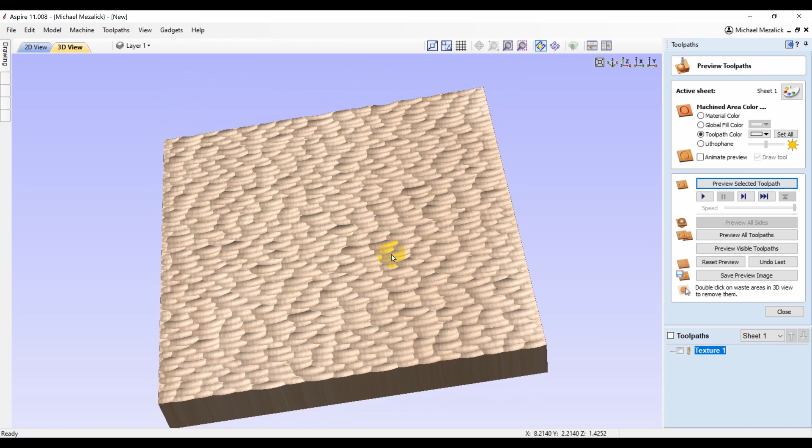So let's see if we can apply this texture to an existing model, giving a little roughness to it, a little hand-carved quality.

I go to our Clip Art tab and randomly select one of the existing models within the software. Let's say the horse. Simply double-clicking on it brings it into our session of Aspire, and I'm going to enlarge it so we can use this texture to see if it's going to work.

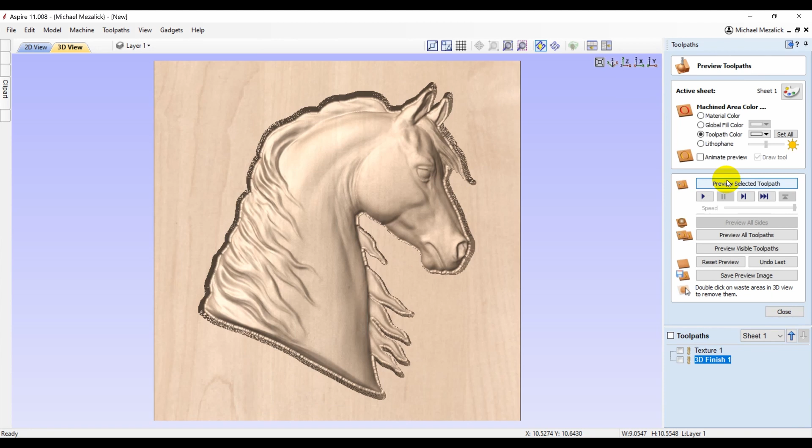I'm also going to create a finish toolpath. This is just for an example - I would maybe use a roughing toolpath in real life, but this is just for the software example. So there's the finished toolpath of our horse, and here's the textured toolpath that I've created.

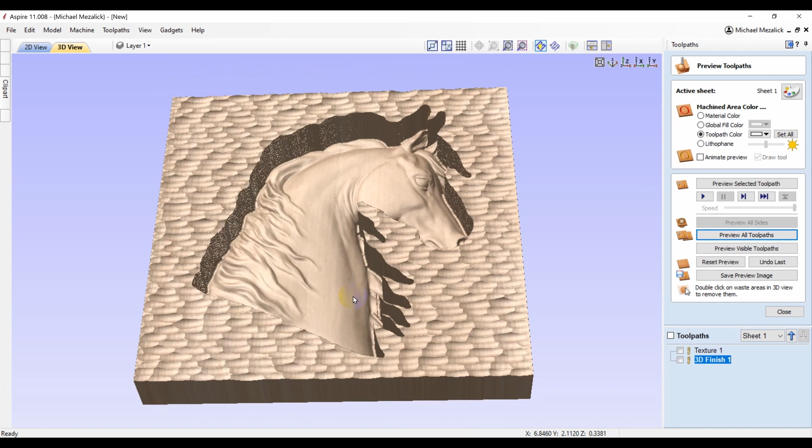Interestingly, the textured toolpath was not applied to the horse itself. The logic is that the texture toolpath will only cut on the surface of the material, unless we go back into the texture toolpath and click on the checkbox that says to project the toolpath onto the 3D model.

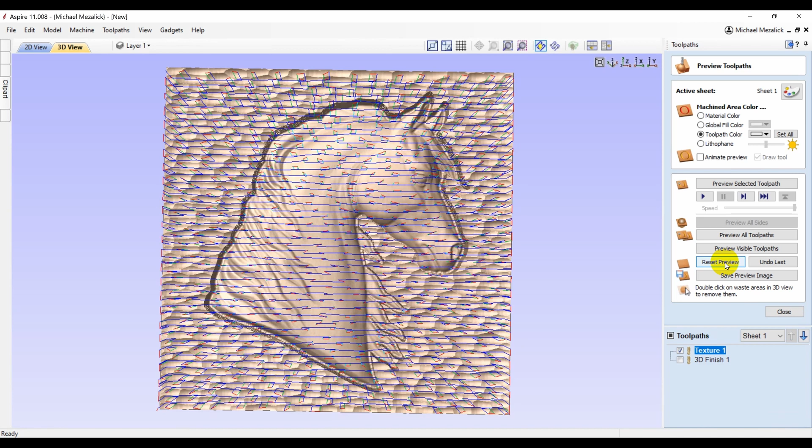Now, if we rerun the preview of our textures, you'll see that the texture has been applied to the horse head, but it also has taken all of the material away.

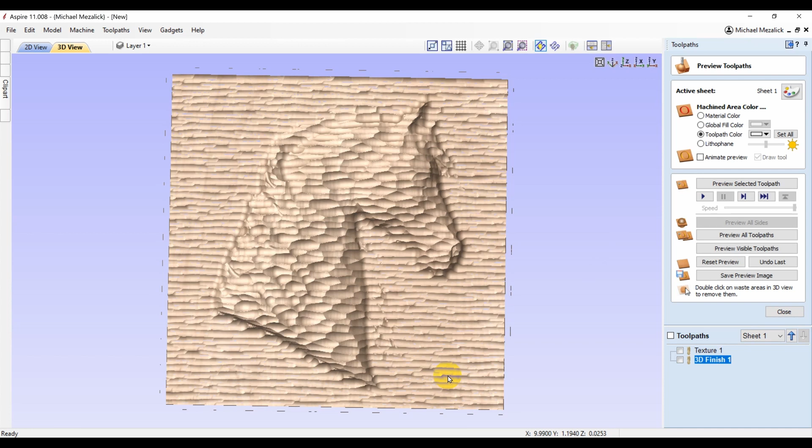So let's run the finish toolpath to see if that helps. It certainly doesn't look like a good finished horse head. Not really what I expected.

Let's try this another way. We take our horse head and create the bounding vector around just that model. I select that vector and create a texture toolpath using the selected vector and the 3D model.

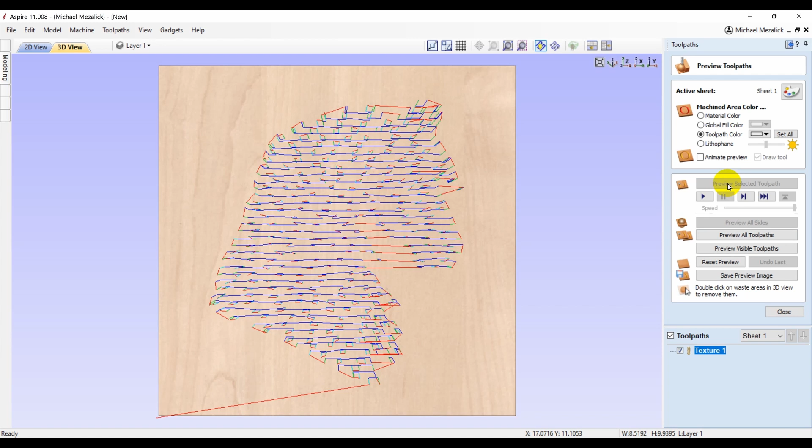And now we have another example of that texture, but it certainly doesn't have the detail of the horse head.

So I go back and create a finish toolpath, once again, of just the horse head to see if this can help at all.

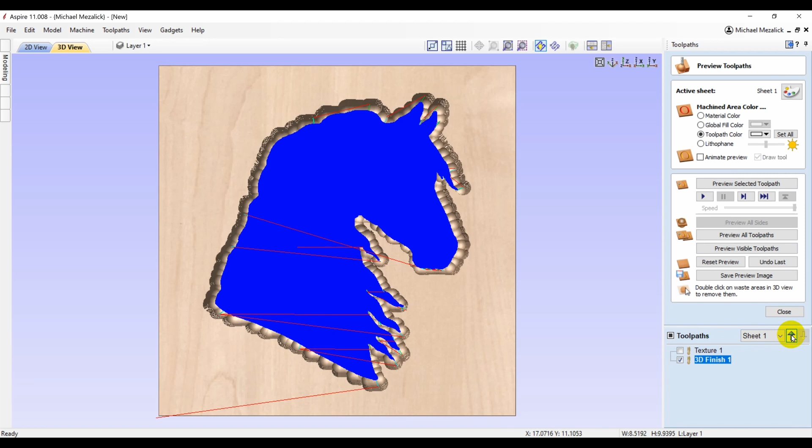Preview all toolpaths after resetting the preview. And still, it's a rather disappointing look. There's our horse head and our texture toolpath - not what I would consider acceptable.

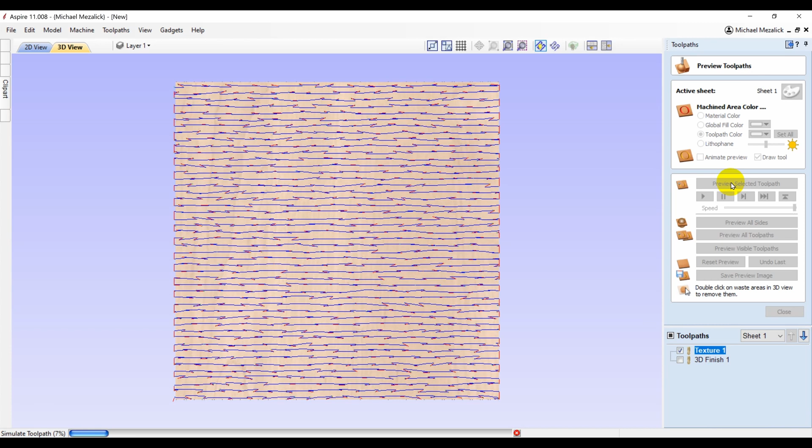Maybe there's another way this could be done. I'm going to create my texture toolpath, not projected onto a 3D model, just so it's a flat texture, in a sense. If you've watched my other videos, you know I'm very fond of using what I call a skin.

So I'm going to create a component from this preview and apply it to our horse head.

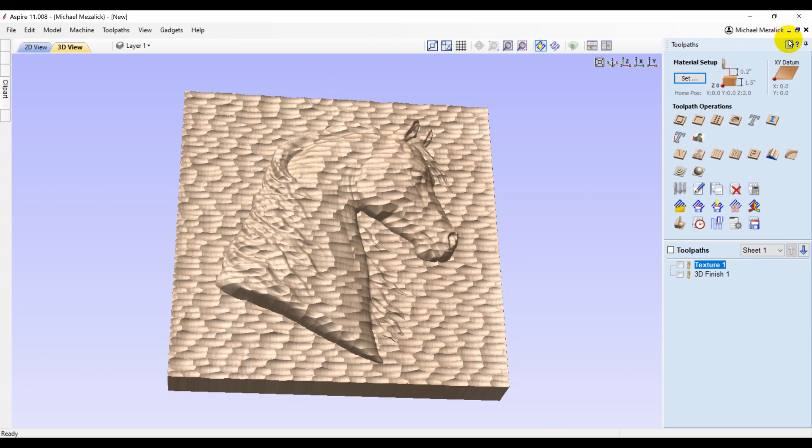You can see in the component tree I have the horsehead clip art, as well as now this texture. Both are set to add, so the texture has been added to the horsehead.

We'll choose that bounding vector of the horsehead and eliminate the outside texture, just so the texture sits on the horsehead.

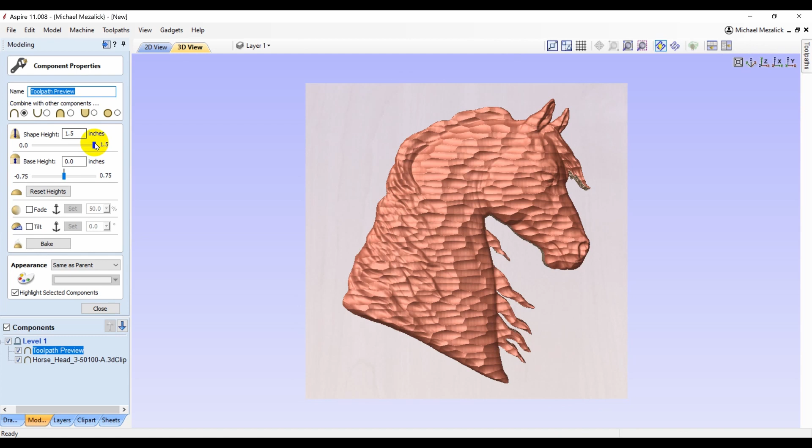Since it is a component by itself, I can adjust its base height and its shape height. This gives me a little bit more freedom to slightly change the end result.

Looks a lot better than the previous attempts, but it's still not what I was looking for. The reason being is, if I was to carve this out, the stroke of my knife would not always be in a horizontal position, or vertical, or whatever angle I chose for the software.

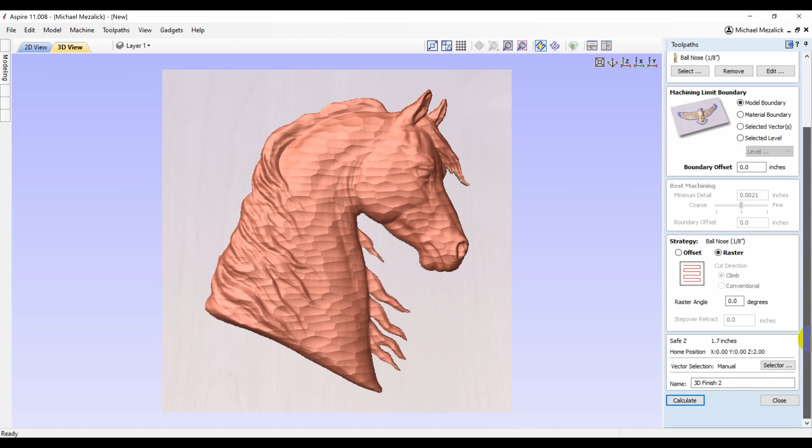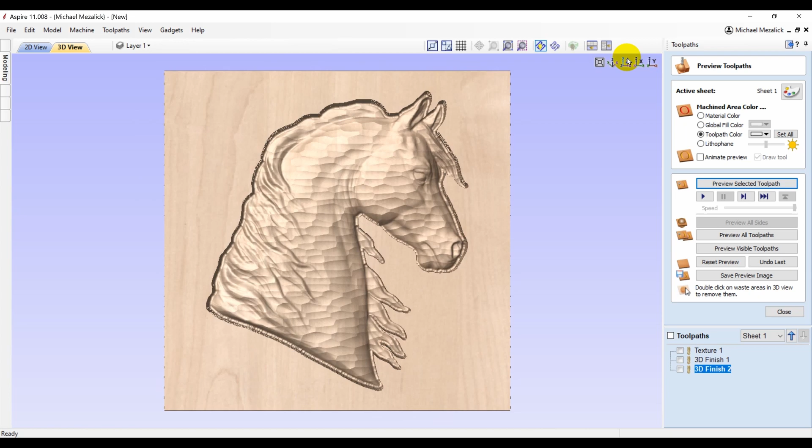I think the strokes of my knife would follow the shape of the head. So, can this be done within the software? Let me show you what I came up with.

So let's start over. I have a session of Aspire open, and I'm going to create an oval. And from that oval, I'm going to create a component shape, a dish shape.

There's no set size on what this shape should look like, or even what the property should be of the profile, whether it's a dish or a pyramid or a flat. I just chose a dish shape because I envision this to be more of that gouged look that I'm trying to recreate.

I right-click on that, and I'm going to save it as a brush, a sculpting brush. I delete my vector, I don't need that anymore, and I uncheck the brush because I really don't need to see it. For this example, here's the new thing in version 11.

We can go into the sculpting tool, and we can choose to use a sculpting brush as our tool. Now this is only available on the deposit and remove options. You cannot use the sculpting brush on the smooth or smudge.

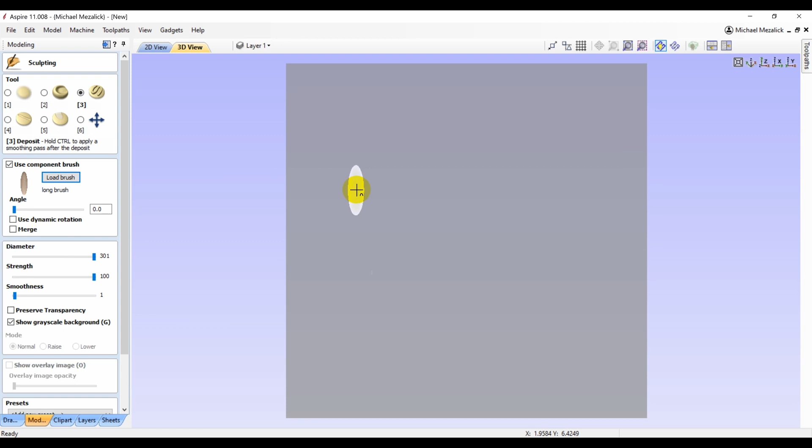It creates a new component. I can take that and hold my left mouse key down and drag it across, or I can keep clicking. But with the property set as default, you could see it's an odd end result.

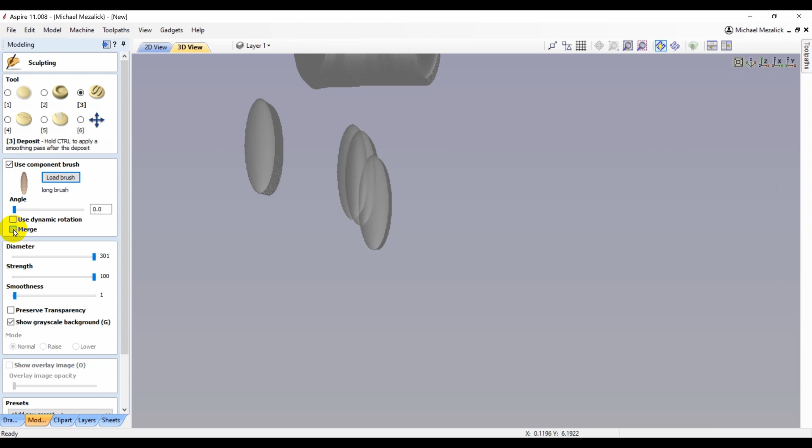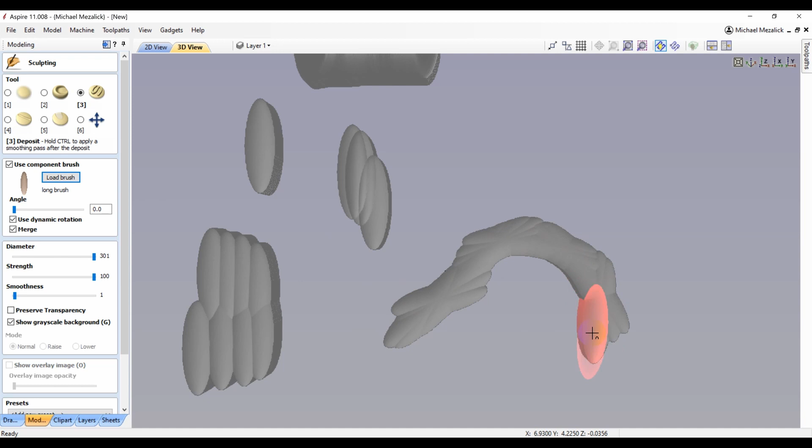Let's choose the merge these components together. And it's starting to look like that hand-carved texture that I'm looking for. There's also the option of the dynamic rotation. With the sculpting brush, you can also rotate it to position it as need be.

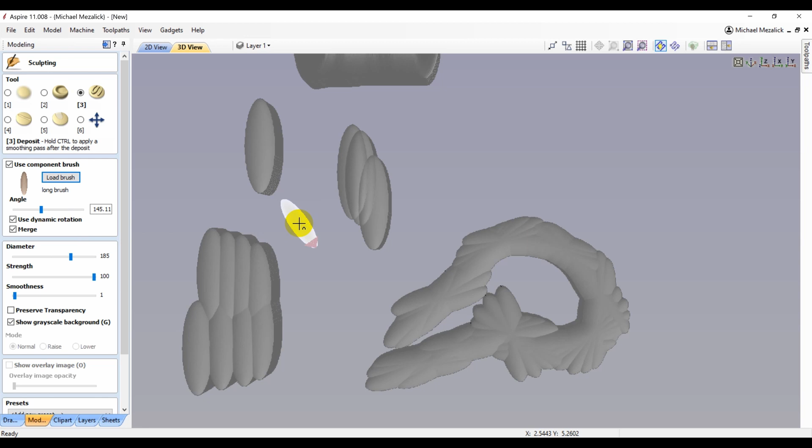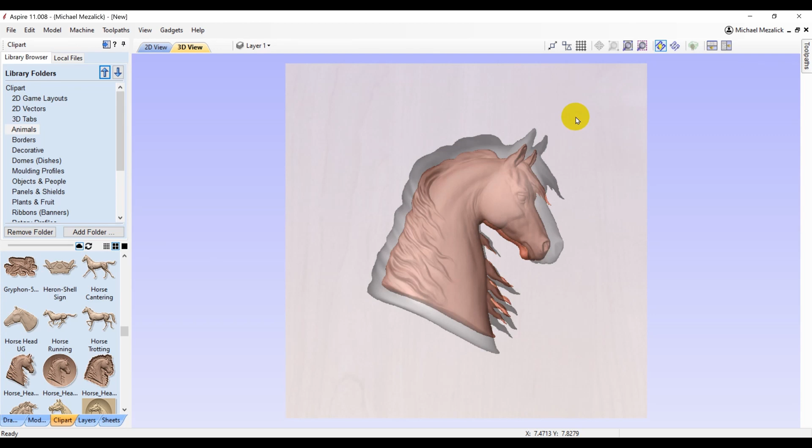So I wonder, is this possible to use to create a texture for my horse head? Let's try. I bring in a new horse head, increase its size so it fills more of our workspace. Go back into our sculpting tool. The horse head is not selected because I'm going to be creating a new component of that sculpting brush.

Choose the brush. Set it to merge. You can see the grayscale can be visible or not if you'd like. Change the diameter to full size. And I can start to apply that texture to where the horse head is.

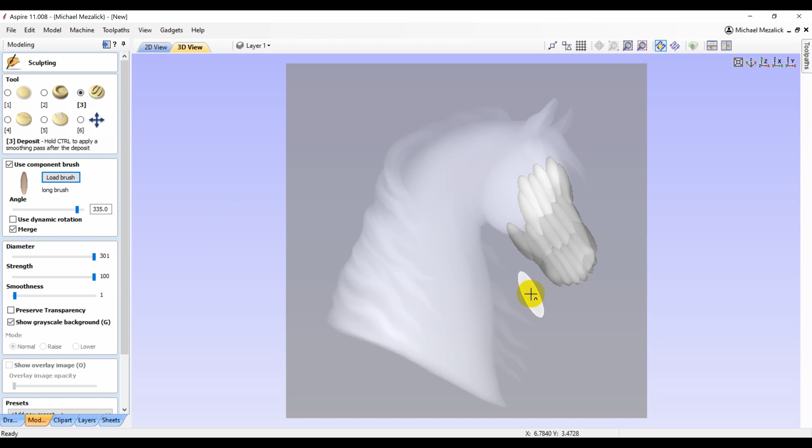And I'm going to rotate now this brush, this sculpting pattern, to sort of follow the undulations or shape of the horse head. I try to envision how I would carve this out if I was actually making it. It does take a little bit of time to think through this. At what angle would you be carving this out with a knife? And what size would you be using?

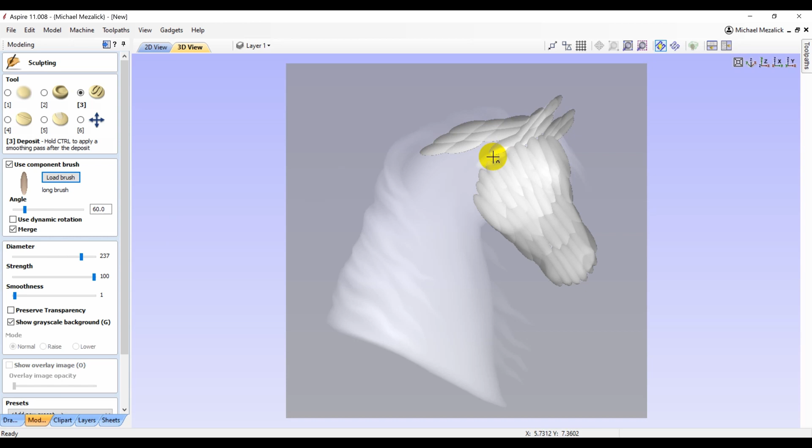I can change the diameter or the size of the component that I'm using for the ears, if need be. I rotate the brush so it follows the curve of the neck of the horse, giving it a more realistic hand-carved look.

The previous texture that we tried from the texture toolpath only goes in one direction. This new approach gives you the option to create a similar look, but using different directions.

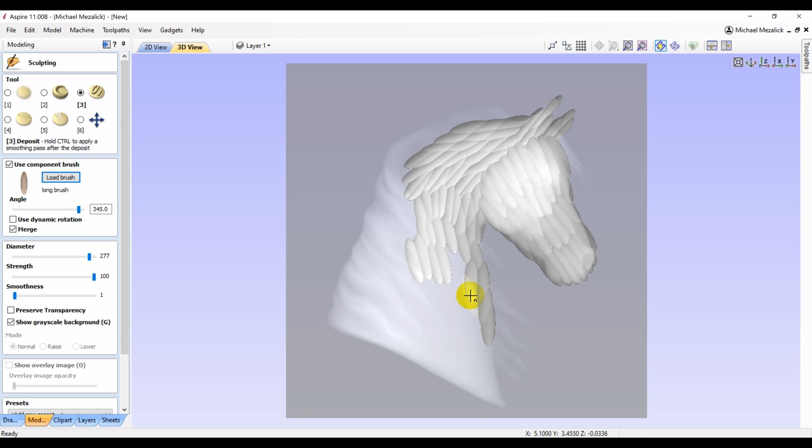I choose not to carve the mane of the horse, simply because I think it'll add a little bit more interest. If I go beyond the horse head, I can always delete that with a bounding vector. When I'm done, I keep it and hit OK. And that's what the texture could look like.

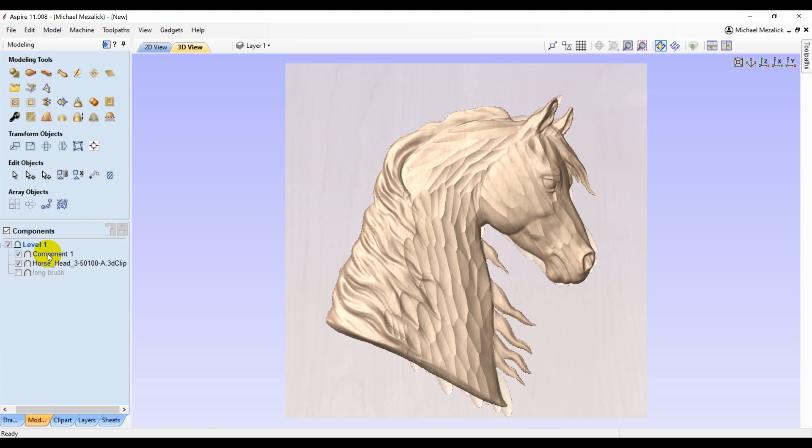Because it is a component by itself, I have the opportunity to adjust the shape height or the base height to make it a little bit more subtle or more pronounced if need be.

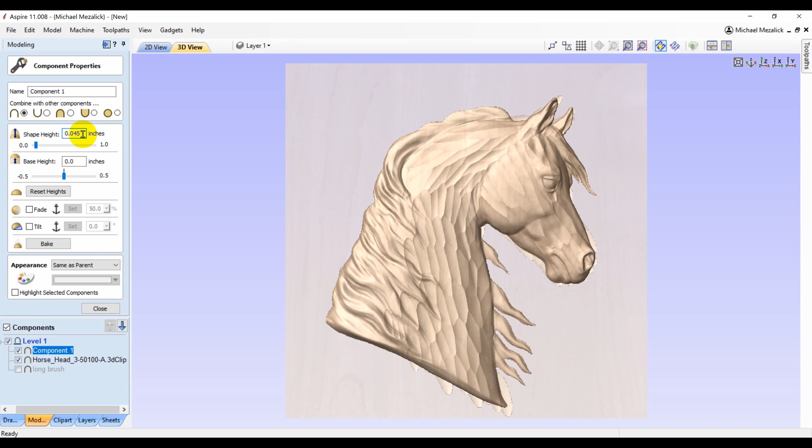So this is just one example of how you can use this new option within version 11, the sculpting brush, to be able to create interesting patterns.

I click on that bounding vector I've created, choose my textured option, and delete everything outside, or keep everything within that closed vector. Again, it's just one more option on how you can change things. The before and the after.

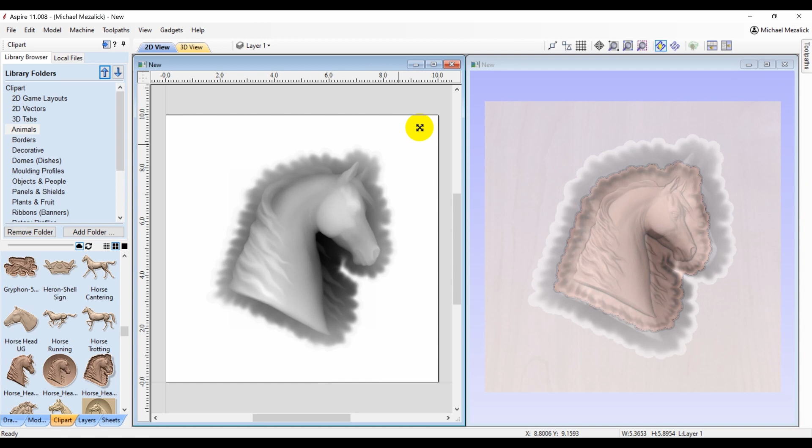Let's take another look at an option that you can use with this sculpting tool brush. Within our clip art library, we have several versions of the models that are included. I'm going to look at that same horse head, except this time it's in this textured or undulating dish shape. I think it's supposed to look as if it was hand carved. I will say I've tried to replicate this many times over the years and was not quite successful. But it does seem to be a popular style for a lot of people.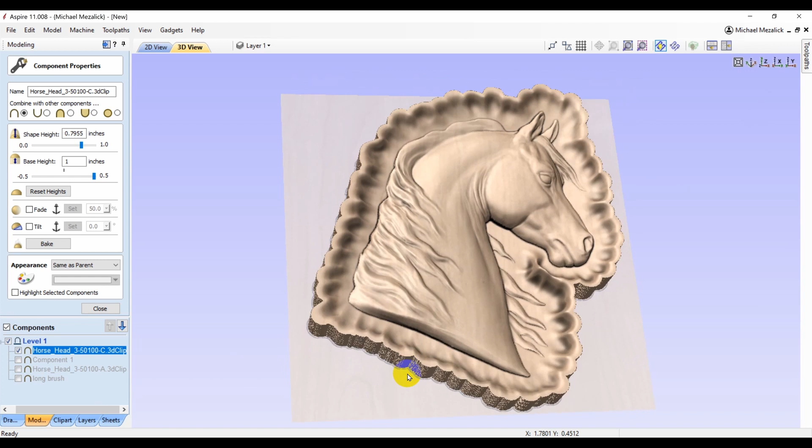Here's an approach that you may want to consider. We have our original horse head. We're going to go, as we did previously, into the sculpting tool. And we're going to select a new brush that I've created.

I adjust the size to full strength, and this is the size of the end result of the brush. I wish it was bigger. I wonder if there would be a way to create a larger brush.

If you're familiar with what I talk about, I always think using very high modeling resolution for your 3D work is appropriate. I also know that this new sculpting brush logic is based upon the number of pixels. The 301 that you see on the slide bar represents that there are 301 pixels being utilized to create that shape.

So, if my very high modeling resolution is only using 301 pixels and creates a rather small component shape, I started to think if I changed my resolution within this model to standard, would my brush then be larger because my pixels are larger?

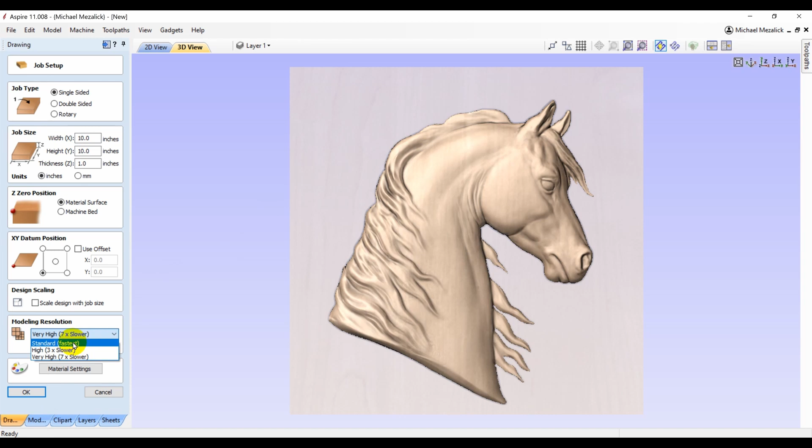Let's take a look. I go into my job setup, change my modeling resolution to standard on the fly. Go back into my modeling tab.

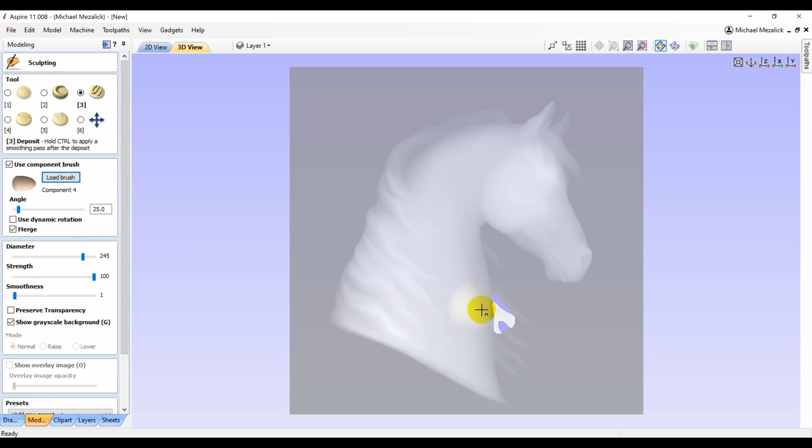You'll see that my brush is much larger. I choose the sculpting brush that I did previously, and now look at the size. The modeling resolution in this case at standard does offer more benefits. It allows you to have the largest brush possible because there are 301 pixels within that shape.

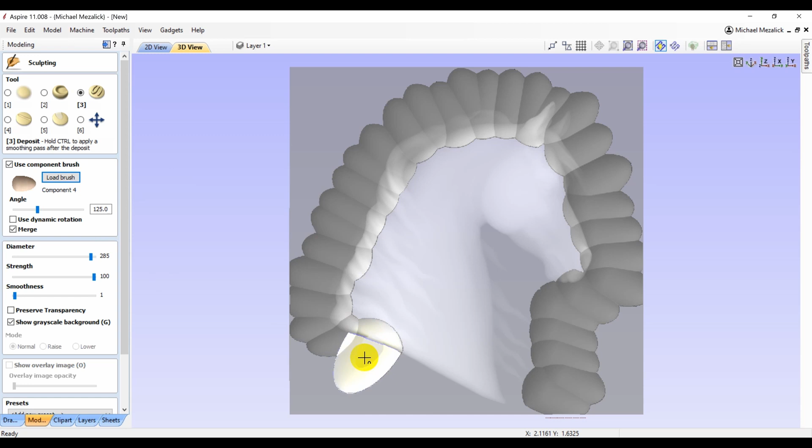I choose a size that's appropriate, and I go around the perimeter of the horse head, creating that hand-carved look. The easy way to rotate it is simply using the wheel on your mouse. You could use the slide bar if you'd like, but the wheel seems to be a lot quicker, and simply click. And there's our component.

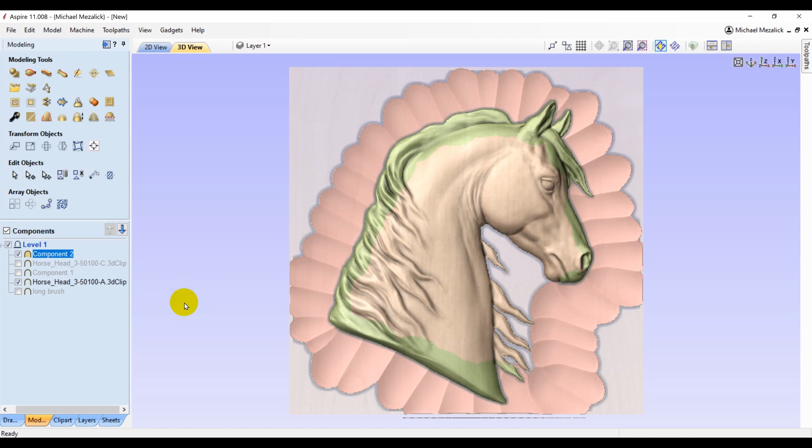Change the property to merge. I'm going to adjust the base height just so that I can see what it looks like more realistically. I also need to adjust the base height of the horse head so it sits above our new textured perimeter.

Add a zero plane, and it's starting to look rather interesting. Something similar to the horse head that comes with the software. That hand-gouged perimeter look.

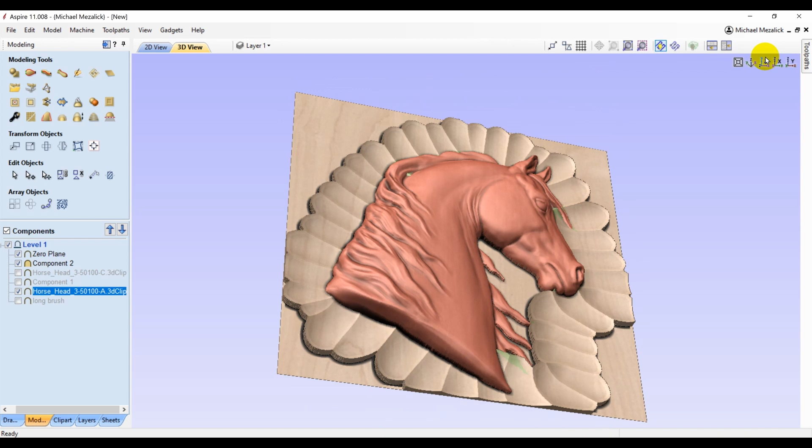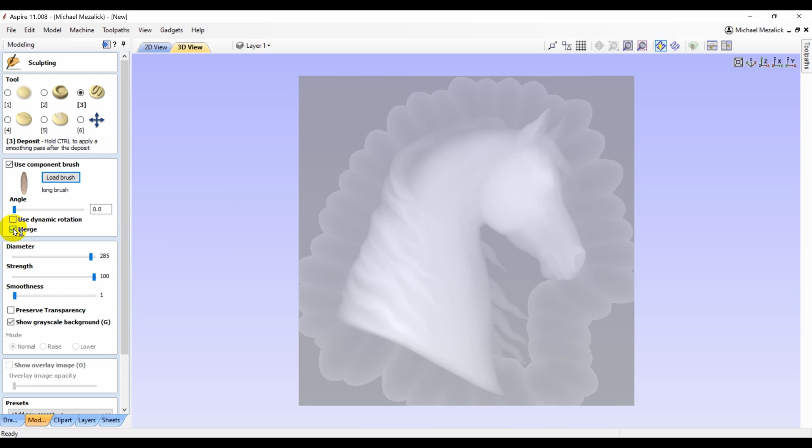I'm going to add a little more texture to the area right underneath the horse head itself, that flat area that I missed. I choose another brush that I created earlier. It's a little longer and a little more narrow to be able to create gouged marks.

You can use any 3D model as a sculpting brush, so you can create your own. Change the base height of this new texture just so it breaks the surface.

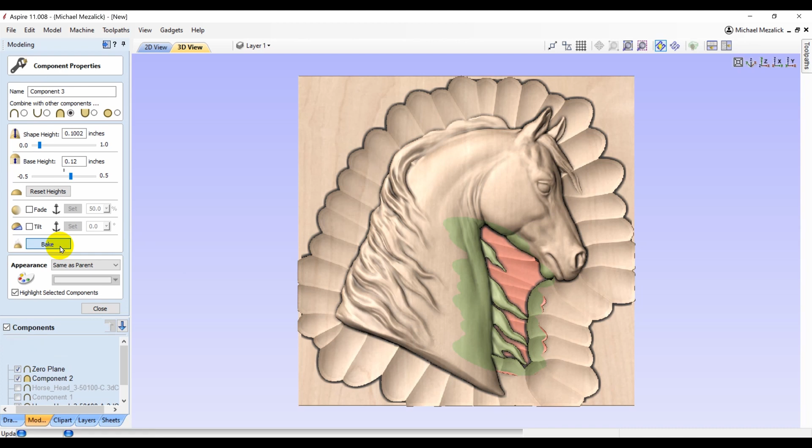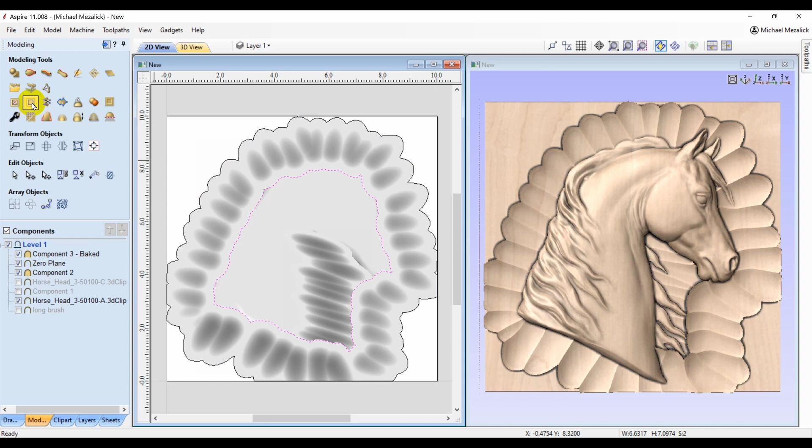Using the technique of drawing a boundary vector around a component and then selecting a vector to delete or keep an existing component becomes useful. And since they are their own components, you can adjust the shape height or the base height as needed.

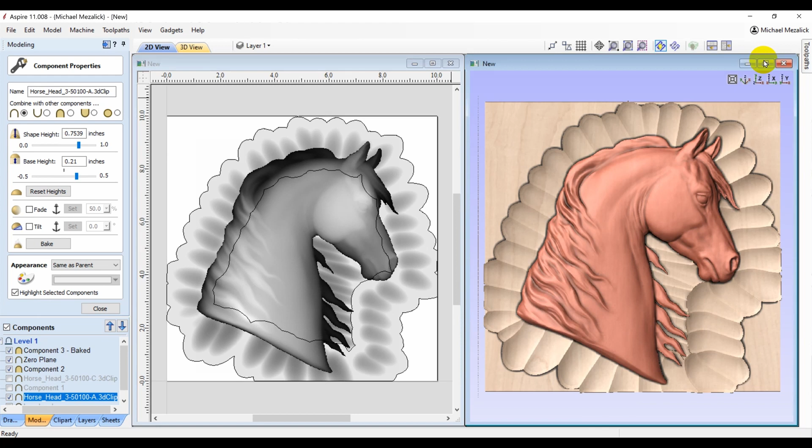So there we have it, a hand-carved look for the background of the horse head.

Let's take this another step further. I'm going to create a new session of Aspire. The normal job setup. The modeling resolution is very high. And I'm going to create some text.

With that text selected, I'm going to create a component. Just a regular flat component with some base height. With that new component visible, I'm going to add a draft to it. This is just to give it a little bit of interest, a little bit of dimension. Looks good so far.

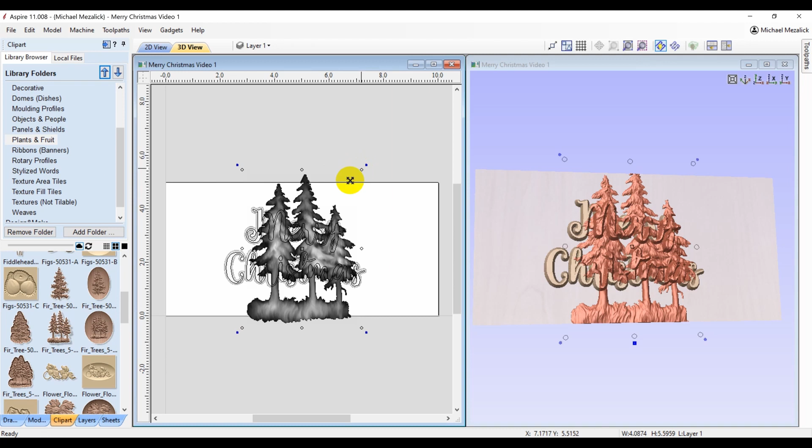Our next step, I'm going to add some Christmas trees, some evergreens. Within the software, we have a grouping of 3 trees. I double-click and bring them into this session and position them accordingly.

I want to make sure that the trees don't interfere with the words, so I set the properties to merge.

With them unselected, I go back to our sculpting option and I use the brush again. I've created a special one just for this project, and as I've said, you can create as many as you want. I try to adjust the size to make it larger, but it's still not as big as I want it to be. You can get rather small with it, but that 301 is the maximum size I can use for this brush. Remember, it's the number of pixels, 301.

So let's close this out. Go back to our job setup and change our modeling resolution. I still believe the very high modeling resolution is most appropriate, but in this case, for this process of using a sculpting brush, standard gives you many more options of size.

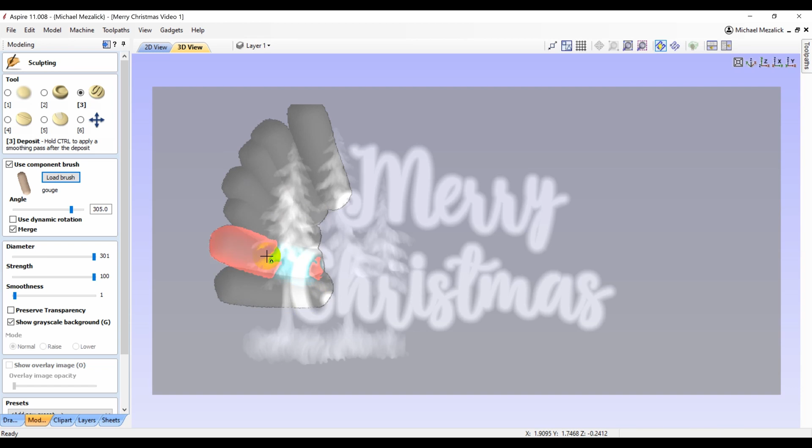Choose the brush. We can see how much larger it is at this point. Making sure it's set to merge. And simply follow the perimeter of our Merry Christmas text as well as the trees.

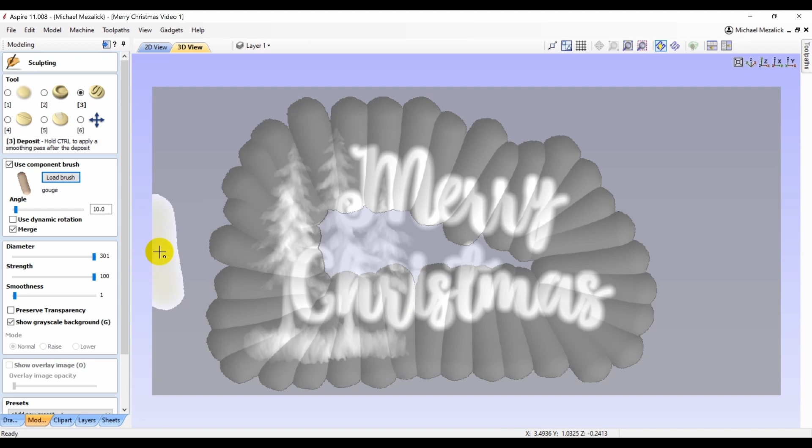This is the first opportunity I've had to experiment with this new textured brush, sculpting brush as they call it. I know I liked it when I first saw it when it was first introduced in version 11. But now that I've had the opportunity to play with it, I can see it offers a wide variety of good things. More options to create unique and individual 3D models.

Adding a little more texture to that center spot.

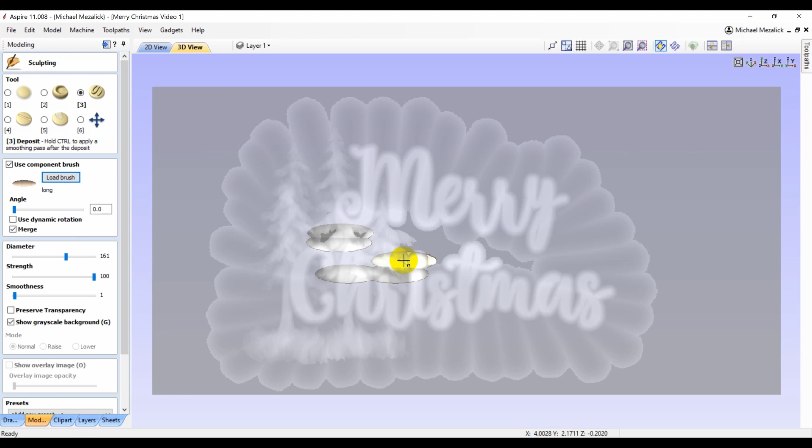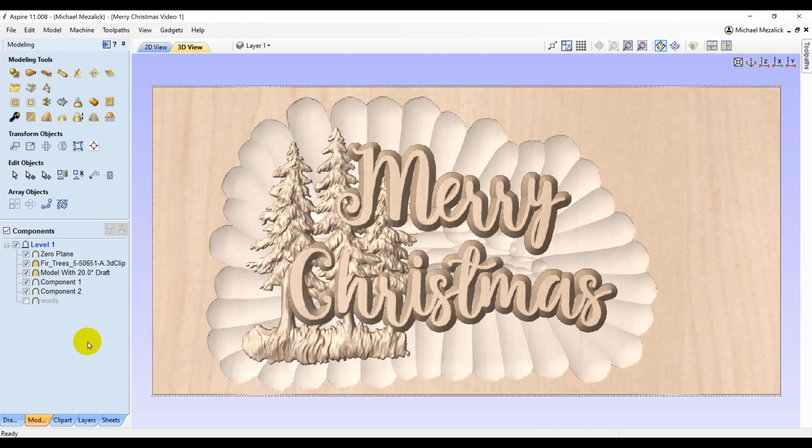I hope you give it a try and come up with your own textures, your own sculpting brush to see what you can do.